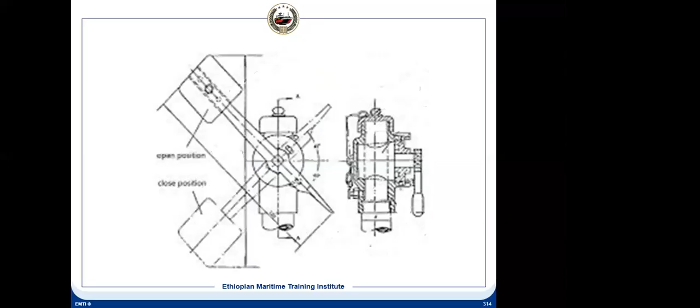This is the open position. So once you open, you push it by hand to this position, that is the valve is open. So you'll have to push it in this direction and then you take the sounding. And when it is in this position, this is the closed position. Clear, understood, all of you?

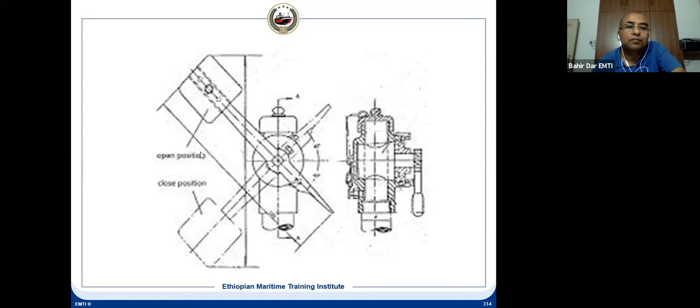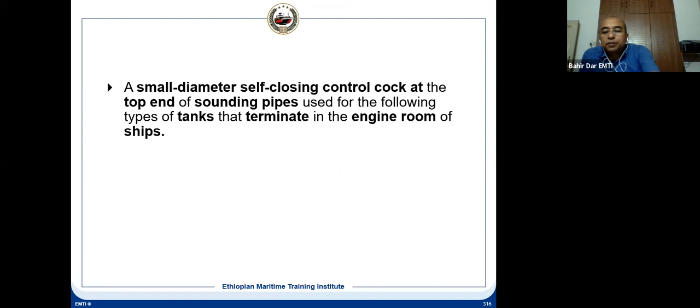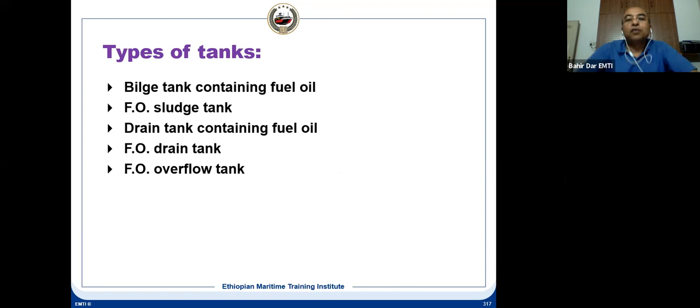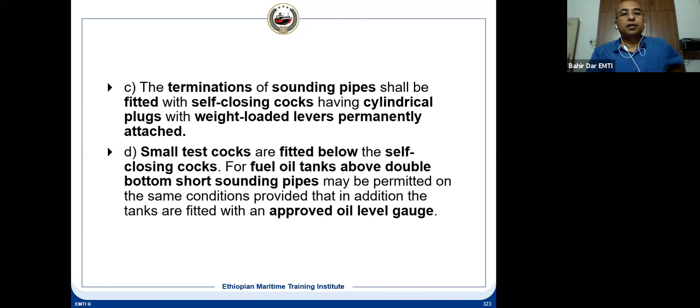Now, what is the SOLAS requirement? The sounding pipe of the fuel tank that terminates in the machinery space must have a self-closing device. So, this means any tank, like bilge tank containing fuel oil, sludge tank, drain tank, fuel oil drain tank, fuel oil overflow tank, all this will have a self-closing device. Any question? Is it clear to you all?

Now, remote operated gear for a bilge valve. So the valves which are required to operate above the bulkhead deck are remotely operated by power and actuators, and there should be an indicating mechanism operating from the operating station, so that you know that the valve is open or closed. It has to be in the same place. Like when you are remotely operating, it is above the bulkhead deck, and also the complete installation has to be fitted within the ship's B/5 and a remote control station situated above the bulkhead deck.

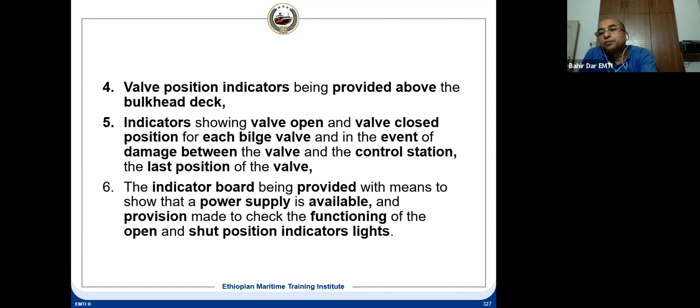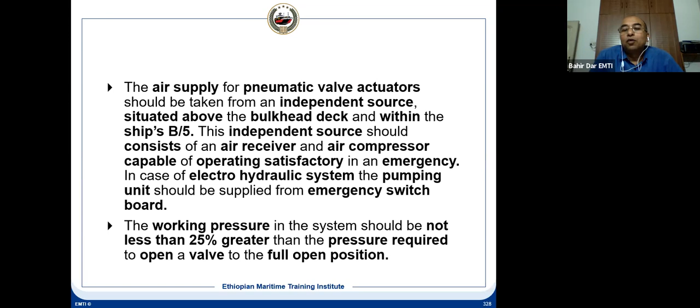So for the air supply of the pneumatic valve actuator, there has to be an independent source, because this is emergency equipment, and it should be situated above the bulkhead deck within the B/5, that is the total breadth divided by 5. And the independent source should consist of an air receiver and air compressor, you can have them separately, and suppose it is electrical, then the supply has to come from the emergency switchboard. Working pressure not less than 25% greater than the pressure required to open the valve to the full open position. So 25% extra power is given.

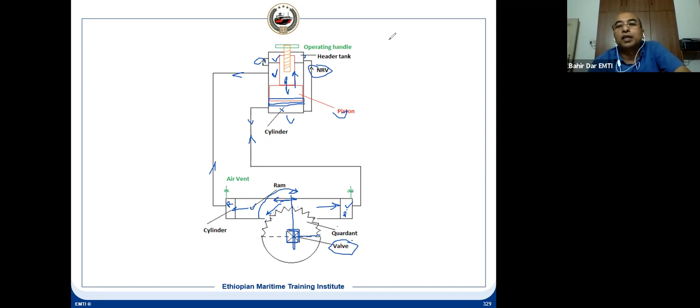And suppose there is a leakage, then what will happen? If there is a leakage, then the pressure will drop, and through the non-return valve, these two are the non-return valves, and this is the header tank, which is kept with oil, and there will be a sight glass. You maintain the level, and then through the non-return valve, that chamber's oil will be compensated. It will be replenished. Is it clear, all of you? So that is the way you can operate the remote control valve, bilge valve.

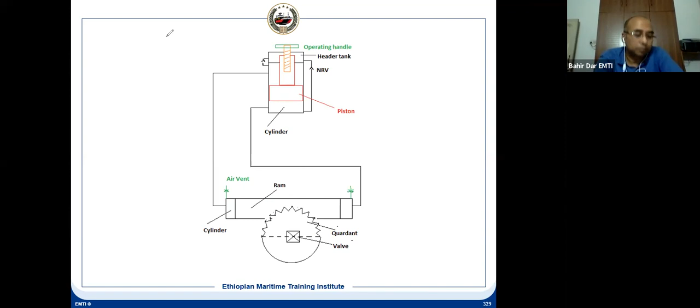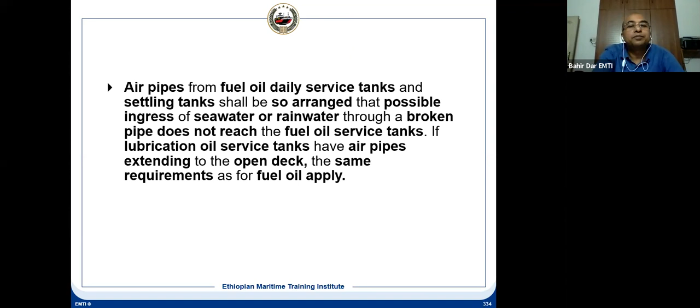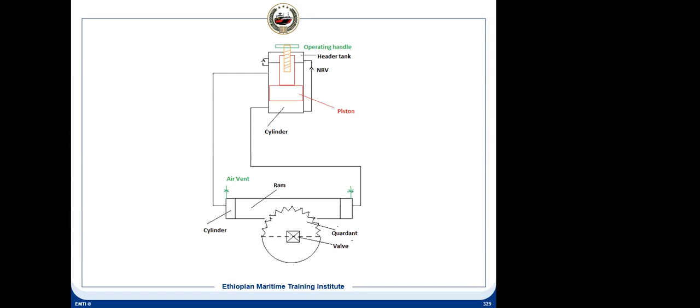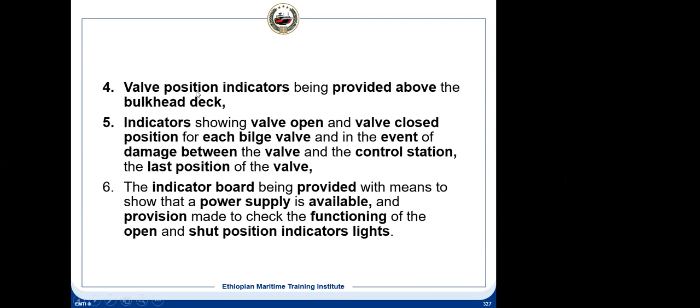Yeah, tell me, Ephraim. Chief, what is the reason that we don't have self-closing valves in the bulkhead deck? I mean, in the sounding pipes. Yeah, sounding pipe. Okay, this one, let me explain. So what is the reason you don't have this self-closing, isn't it? That is your question. Because self-closing is not required.

Here it has to be self-closed. Otherwise, what will happen? Flooding will take place. If your DB tank bottom is ruptured, or somewhere there is damage, water will flood the engine room. As well as, these tanks have fumes, hydrocarbon gases, that will come to the engine room. The engine room will become hazardous. So if there is any damage to the DB tank, that will terminate at that point. So the water will not enter into the engine room.

If you don't have self-closing and somebody forgets, it is not closed, then water will come. That's why the PSC inspector and classification society surveyor strictly check if it is functioning properly or not, malfunctioning, or somebody has lashed it or not, because it is for the safety of the ship, otherwise the engine room can be flooded. And also from the fuel oil tanks, the fumes, hydrocarbon gases can be released to the engine room.

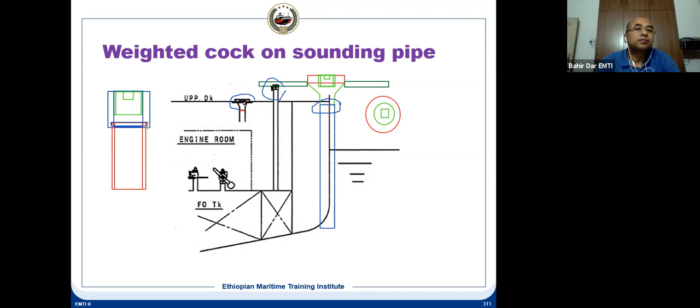And there are threads. Here there will be thread, here there will be thread. So this is screwed onto this, and then you open this one, and then you take the sounding, because the blue one is like this. So on top it will be threaded here, and at the bottom it will be threaded here. Is it clear how it is? Yes, it's clear.

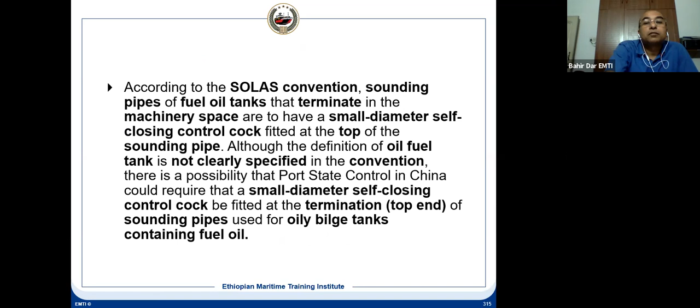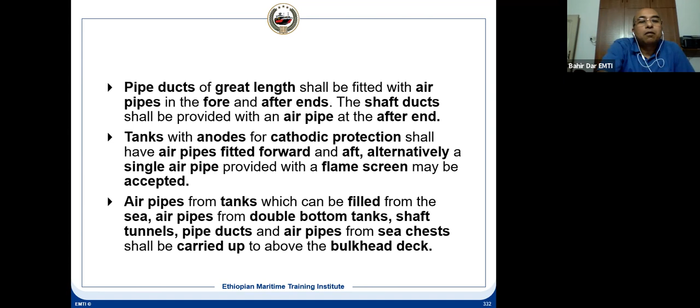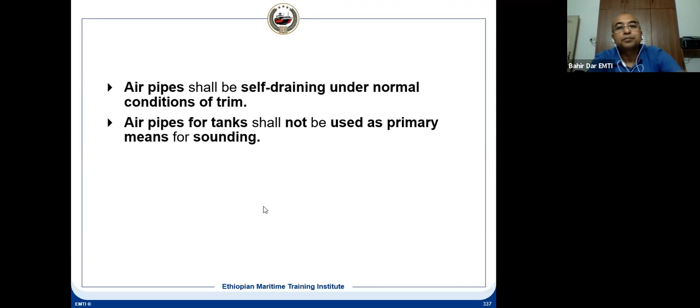So okay, now let's go back to another chapter. Okay. Before we go into this, one of you from the Addis office has sent this. I think Tilahun had sent this.

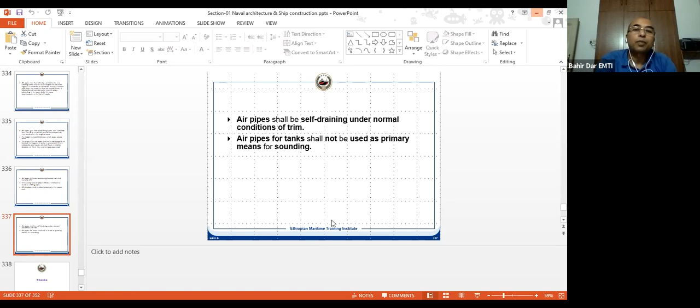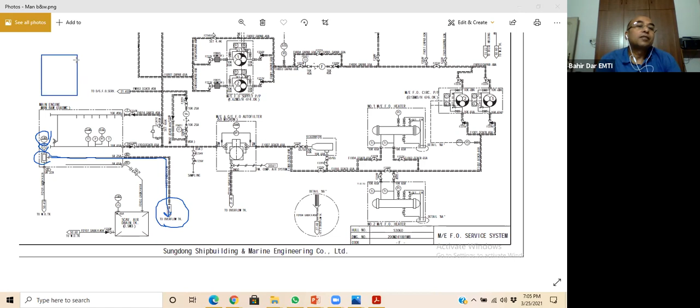On some ships it goes to the drain tank. That's why I was using that terminology, drain tank. So in your ship, it goes to the overflow tank. It means you have a tank where any leakage inlet is coming here. And at the bottom there will be a line which, in your case, is going to the waste oil tank. And that is shut actually.

Once this oil level goes up, then what will happen? At one point it will overflow, and that is the line you are talking about, which is going to the overflow tank. And you have one float here. That high level alarm, that float will move up as the oil level goes up, and once it moves up, it gives you a high level alarm. It means it will give you a high leakage alarm.

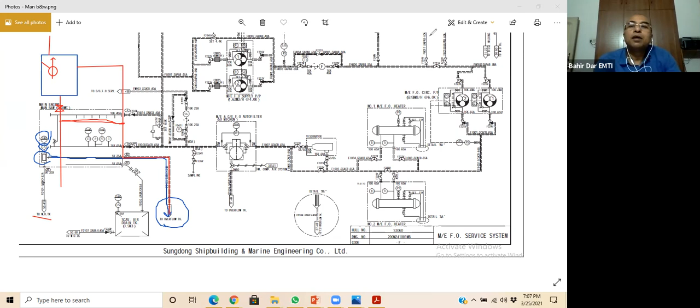And in your ships, it goes to the overflow tank. And suppose you want to drain it, you can drain it to the waste oil tank. So at the bottom, it goes to the waste oil tank. Sometimes the bottom also goes to the drain tank. In that case, there will be one valve, and this connection will be here, so there will not be a separate line going to the waste oil tank. Is it clear, the Addis office? Yes.

Now, another thing you have told. Now tell me here, which one is in series? You see, all are in parallel. For the auxiliary generator? Yes, the generator will be in series. You are talking about this, correct? Yes. Yeah, this will be in series, because one is lower temperature than the others. That is the reason we put it in series.

Now tell me which one is in series. These two. First cooler is which one? You have a cooler here. Which cooler is it? For auxiliary number 1, number 2? No, you have three generators, all three will be the same. There are two coolers, this one and this one. Which one is this? That's for the air cooler and the lube oil cooler. So first one is air cooler or lube oil cooler? The first one is air.

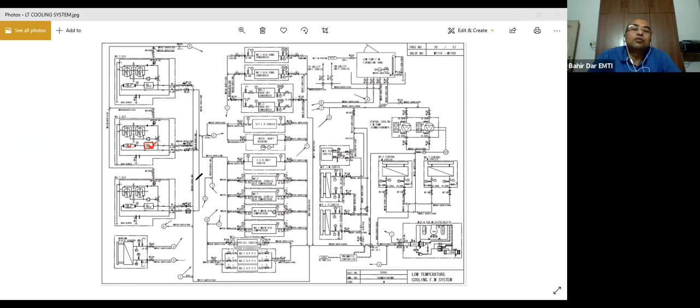Yeah. So this is in series because the air cooler temperature we are maintaining is lower, meaning we need more heat transfer, because the air inlet is after the compressor of your turbocharger. So we first cool the air, and then the same water goes to the lube oil and cools the lube oil.

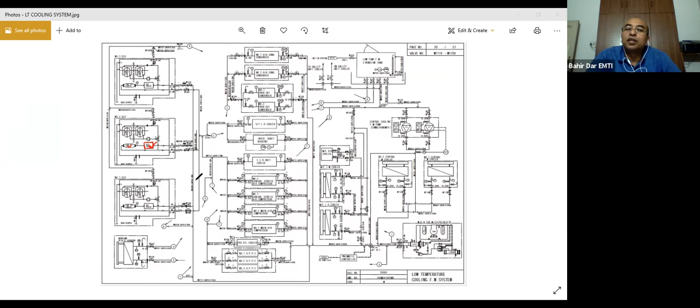So this is the arrangement, because after the air cooler, the water can still take the heat away; it can be used as coolant for the lube oil cooler, and it can reduce the temperature to maintain around 40 degrees for the lube oil also. Yes, I get the idea.

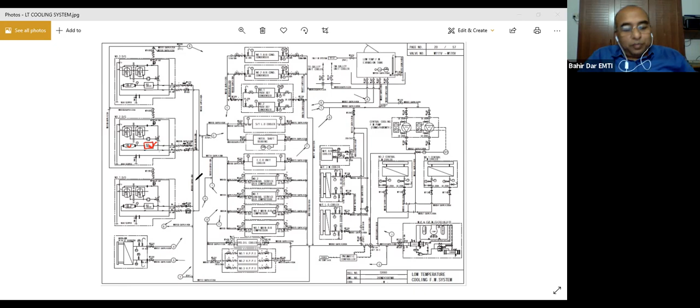But my question is, if we have a malfunction, for example on auxiliary number 1 or auxiliary number 3, the cooling water inlet valve is broken, how do we manage to fix it? Yes. That's why what I said, it is for the same system. Suppose here there is a problem, and this is no problem, but will you be able to run the engine? No. So you shut down this engine, and you need to isolate.

If the valve is leaking, here you see there are two valves, and on the return line there is one valve. So you can isolate from these, because this engine is inoperative now. Whether one heat exchanger or the other is defective, there is no separate isolation. If you want to isolate, you'll have to isolate from here. Individually, you cannot isolate, because it is in series.

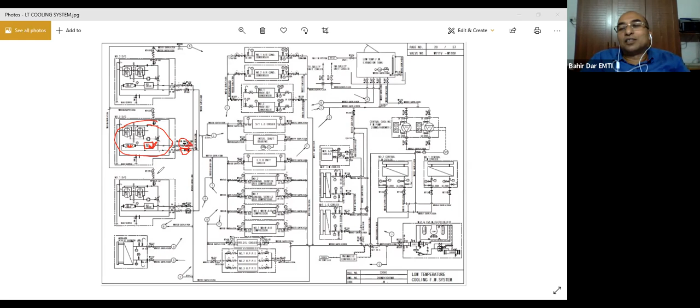For example, the cooling water will come from the line which is the inlet line for all three of them. This is in one line - the inlet is in one line. As you see, the return line is the same, in series. So to change the inlet valve, we close it.

Which means the other generator will not get... in the return line, the other generator will get the return line. Why will it not get the return line? All are parallelly connected, you see.

These are parallel connections. Why should it affect the other generator? Tell me, Tilahun. Because after returning, it goes to the other system. No, if you see, this is only within one generator. So this series connection is only - you see the line.

It is going like this, and it comes back to the connection here. And this is it, it's coming, the connection is from here. And then it enters like this, and then it goes to the return line - the other return line - all meet and then go to the overboard.

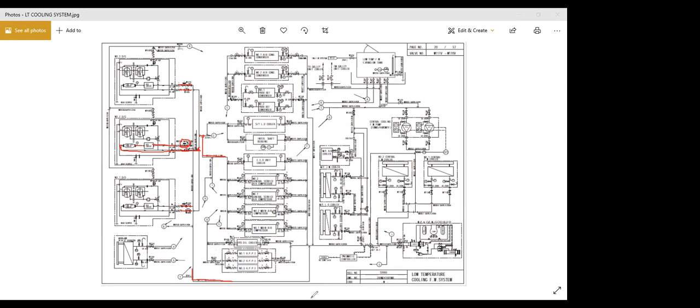But one thing remember, suppose all three generators are running, then what will happen? Your cooling water is open to all three or not? So your capacity should be such. But if you have a problem with the capacity because of wear and tear of the pump, then you can use the spoon and blank. Clear? Understood?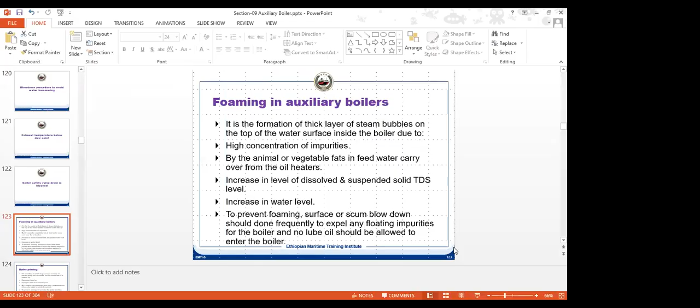Now tell me, what is foaming in the boiler?

Before that, tell me, does anybody have any question? Yes, Chief. Yeah, tell me.

In the engine cooling system, we have this connection with the fuel, it's hot water, I don't know, is it like steam tracing or something? I was not here, I didn't hear the answer for that. Yeah, so okay, you are Abraham, isn't it? Yes, Chief. I'll send it by email to you all, so it will come to you also. Okay.

The this thing, Mirga, you raised your hand, tell me. It's about the refrigeration compressor, Chief. Yeah, tell me.

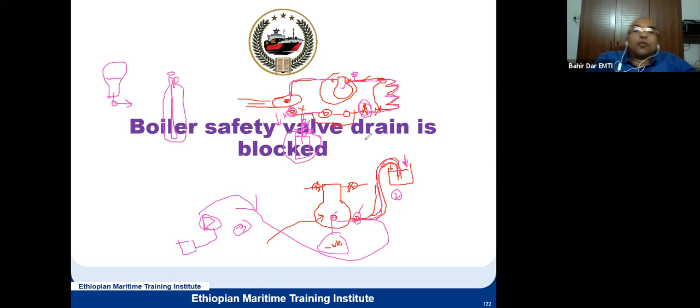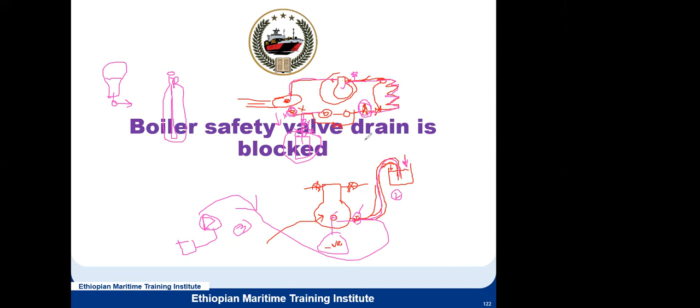Clear? Understood? Any other question, tell me.